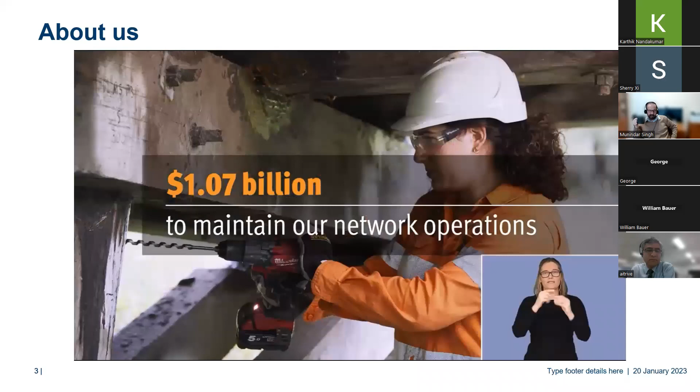Queensland, home to more than 5 million of you. We're connecting you from A to B by more than 33,000 kilometres of state-controlled road, 6,000 kilometres of rail track, and 130 million public transport trips each year. Our job, no, our passion, is to deliver a network that is accessible to everyone at every age or stage. We're investing more than $5 billion to improve our transport infrastructure, making your roads more flood resilient and bringing new ways to pay, so you can use our network your way. We're making your health and safety our top priority. We're always listening to you, creating more online services than ever, serving customers online over 11 million times each year. We've kept the state moving, transporting more than 1 billion tonnes of freight, adding 27 kilometres of new cycling infrastructure, and building 9 new boat ramps, pontoons and jetties. We're investing more than $1 billion to maintain and improve our network operations. We're recycling over 1 million tyres and using them to build our roads. We're switching more than 35,000 streetlights to smart LED technology. We're creating a transport system that's environmentally friendly and socially sustainable, investing in skills, creating jobs, and embracing new technology. Queensland, we're here for you, to connect you to family and friends, schools, work and hospitals, to create a single, integrated transport network accessible to everyone.

Right, now my role in such a large and vast department is leading the Cooperative and Highly Automated Driving pilot. Back in, I think it's about 2016 or so, a lot of the car manufacturers were coming up with some fantastic statements which they struggled to fulfill, as we can see now with the benefit of hindsight. And in those days we were a little bit concerned about what we as a department are doing to ensure that this technology and the vehicles are rolled out on our network in a safe manner.

And so the entire work, which we started initially from 2016, ended up with a team called the Cooperative and Automated Vehicle Initiative team. And within that team, we have several projects which focus on connected technology as well as on automated technology. And my role is I lead the automated side of those technologies.

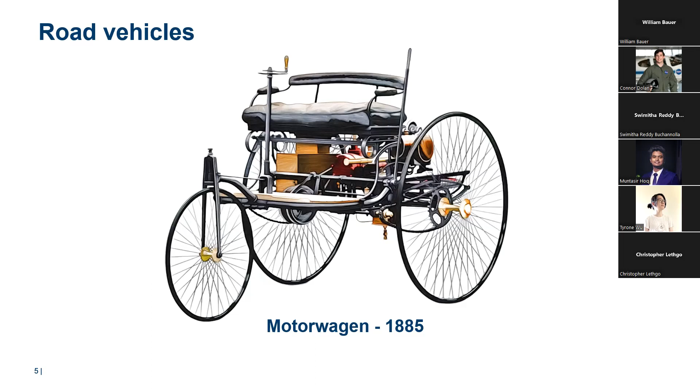Over the years, the automobiles have evolved significantly, and over 135 odd years, this is what today's vehicles look like. They're totally different, but when you scratch the surface, the fundamentals are very similar. There had been significant improvements, but there had been one unreliable component which existed in 1885 and still exists in today's cars, and that is a human driver. So much so that in 1885, when Carl Benz was demonstrating his motor wagon, he actually crashed into a wall during the demonstration, potentially the first recorded road crash in the history of automobiles, I would say.

While the automobile technology has improved significantly, in the meantime, the computer technology has evolved many fold. If you look at the computer of the day in 1885, the Thomas arithmometer was basically a mechanical calculator, and compare that to today's computers. I have on the slide NVIDIA's Orin chip, which packs some 17 billion transistors and 200 trillion operations per second. I've seen some of NVIDIA's latest presentations, and they have now got a new one. I think they call it Thor, which is 5 times faster and packs in, I think, 50 plus billion transistors in a 1 square inch die of the silicon chip.

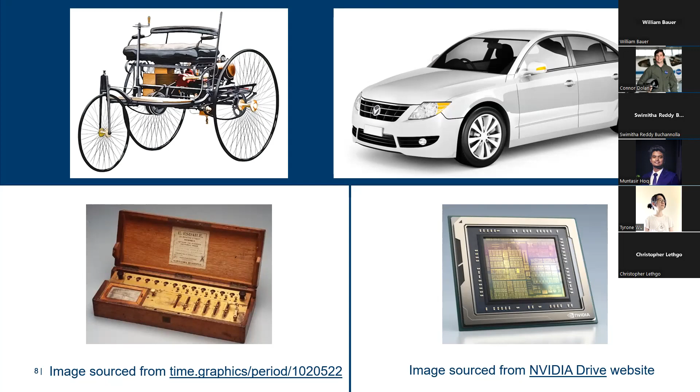Now, because of this massive transformation and development in computer hardware and software, this is the first time ever that we could think about either replacing that unreliable component in automotive, which is a human driver, or supporting a human driver. But at the same time, we know that when you introduce a new technology into the mix of our current road infrastructure, vehicles and road users, it comes with new risks. And we need to understand those new risks so that when this technology arrives on our roads, we have appropriate mitigations in place. Because of that, when we started thinking about it in 2016 or so, we came up with this project, which we call the Cooperative and Highly Automated Driving pilot.

We did a lot of negotiations and other things, but it actually started when agreements were signed with our university partner, Queensland University of Technology, and our federal government research institute through federal government funding, called iMOVE Australia. So, as I said, our focus is safety. The scope of our project is trying to understand the safety impacts and benefits of cooperative and highly automated driving. In that, particularly, we were focused on the benefits or impacts on road infrastructure, and that is physical infrastructure.

Then we also want to have a look at digital infrastructure, and that is work package two. So we have several work packages in the pilot. Then the impacts of interactions with other road users. We acknowledge that in Australia we would have unique Australian conditions, and for that there'll be some unique solutions that need to be developed. And we wanted to understand what those unique Australian conditions are. For example, in Australia we currently do not have any automotive manufacturer. We basically import all our cars. So we recognize that the technology is going to be developed in the United States, Europe, Japan, or China, and we will be the consumers. So we wanted to make sure that when the technology is developed overseas, those developers ensure that certain unique Australian conditions are appropriately taken into account.

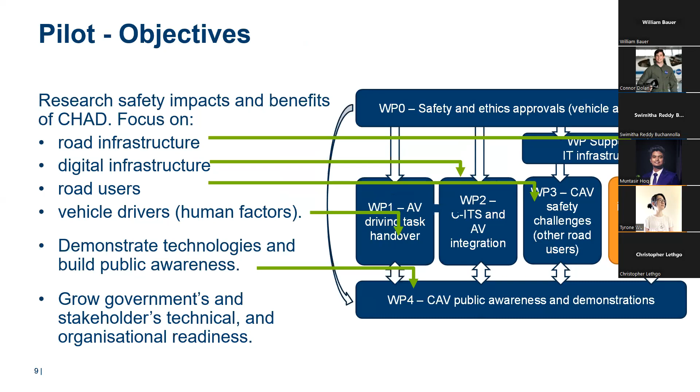And in looking at the physical infrastructure side using Zoe 1, we actually drove the vehicle for about 1,200 kilometers on the Southeast Queensland road network, day and night, in various weather conditions, in a rural environment, urban environment, highway environment, and tested 4 separate competencies: road lines, road signs, traffic lights, and accurate localization positioning.

We took whatever was available as an initial stage. We took algorithms which were open source, and then we trained them ourselves to work out what are the limitations of those algorithms for those particular competencies. So for example, this was done in 2019, we used LaneNet. It's an open source algorithm. We trained it for our road conditions, for the line detection, and with a little bit of training, we were able to get very good performance on line detection.

And why we needed to do this, we actually wanted to open the box of AI and understand how AI functions itself. There were a lot of projects in Australia in 2019 where people were buying off-the-shelf vehicles, Audi, Mercedes, Tesla, and so on, and then put a camera and observe what the vehicle was detecting and then concluding. And we thought that may not be the right way, because technology will change, and we cannot keep on changing our road infrastructure for the evolving technology. So we said, instead of that, let's question the technology itself.

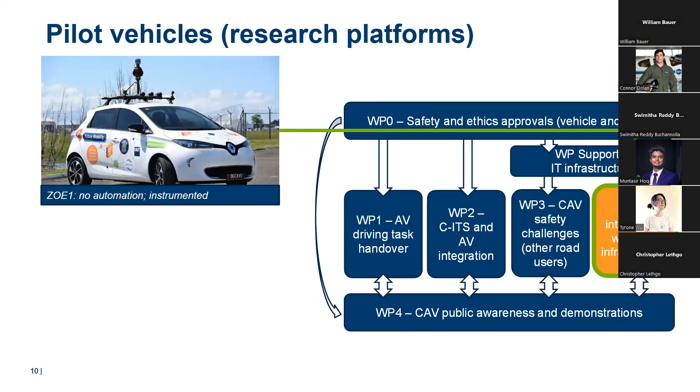Then we are working on various work packages. Work package 1 is, as I said, driving task handover. We have recruited several public participants representing various age groups and so on. They sit in Zoe 2. We actually encourage them to come along with a book, and Zoe 2 drives them around in a controlled environment. So we have a closed test track, and Zoe, our vehicle, drives them around for about 33 minutes while they are either reading a book or watching a video.

And along the way, we also designed an experiment where they need to answer some questions about the video they're watching. What we're trying to do is involve them in a cognitive way, and along the way, the vehicle triggers a takeover request. We have all sorts of sensors around, including the driver's gaze. And we also do analysis to work out, following the takeover request, how long it takes for the driver to exercise appropriate, safe control and come into situational awareness.

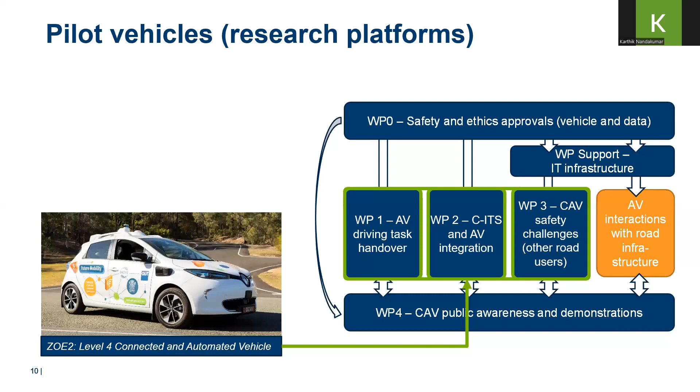And those 3 are our unique wildlife, especially our kangaroos, and our long trucks, so we have road trains that are quite long, and we have some unique roads in the country which are narrow, 4-meter wide sealed roads with unsealed shoulders, where we have traffic in both directions on that narrow road. So these are 3 unique situations, and we have collected a few thousand kilometers worth of data, and now we are creating algorithms to deal with those situations, and the learnings will be made public sometime in August, September this year. So these are the kind of detailed work that we are doing with our cooperative highly automated driving pilot.

Now, I understand that this group is more interested in AI and how that plays out in automated vehicles, so I've got a few slides on it. The way automated vehicles function, and literally from Waymo to everyone, they will tell you the same thing, they basically have four blocks within which they work: localization, knowing where the vehicle is in the world; perception, knowing what's happening in that environment; then decision making; and then control.

Decision making is basically based upon various road rules, estimated trajectory, and creating a path forward. And control is basically providing information for the hardware, such as steering angle, brake, acceleration, including the side lights and hazard lights, and so on and so forth.

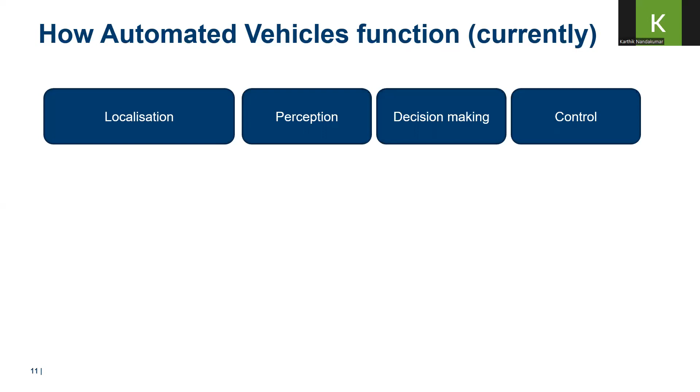So localization, the way things are currently being developed and carried out, you have lots of different ways of doing it. So you've got GPS supported by RTK, inertial IMU, and there are lots of different ways and different technologies that you could use. You have simultaneous localization and mapping, SLAM systems. Literally everyone uses them, and for that you will need some sort of a prior map of the environment to have fairly high levels of accuracy.

When it comes to perception, you've got all sorts of sensors. I just listed a few sensors, but at the end of the day, all the sensors are used for object detection, recognition, and tracking, and then situation understanding via scene segmentation. I've seen some companies use some other sensors as well, microphones. Some of them have an infrared camera as well. So there are different ways of doing those things.

When it comes to decision making, things like road rules, predicting the trajectories based upon potential interactions with various actors in the environment, and then control, as I mentioned, steer, brake, accelerator, side lights, and so on and so forth. Now, when you look into each of those blocks, there is a significant amount of AI being used for localization and perception. But, and again I would stress this, currently there isn't as much AI being used for decision making and control, and there are reasons for it.

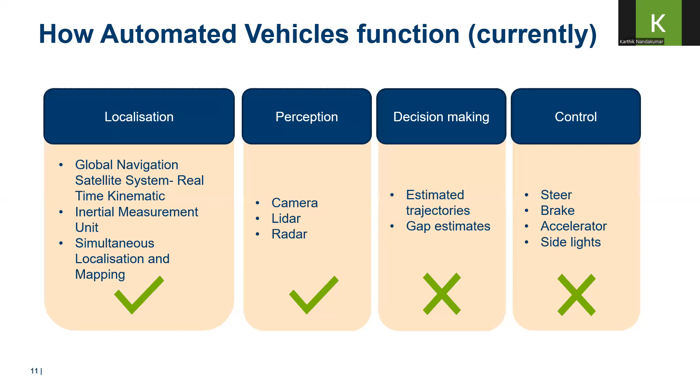And in that co-regulatory model, the criterion we have is so far as is reasonably practicable, and that's our safety criterion. We are not prescriptive about how you achieve that, and that way we allow the manufacturers and tech developers room to innovate. But at the same time, our draft codes clearly mention that the tech developers will need to provide a statement of compliance. So although it may not sound prescriptive, there are technical standards involved, and the tech companies will need to adhere to them and provide a statement of compliance.

Now, one of the key differences between a prescriptive regulator and a regulator who discharges its duties under a co-regulatory model is the word approval versus acceptance. When you have a prescriptive regulator, certain actions or deliverables are approved, and that's the word being used. While in a co-regulatory model, the word approved is not used. Instead, we use the word accepted. In other words, these are your claims, this is your statement of compliance, we ask a lot of questions, and then we accept and provide a permit, or we don't accept and we don't provide a permit. So there's a major distinction between the model of co-regulation versus the model of prescription.

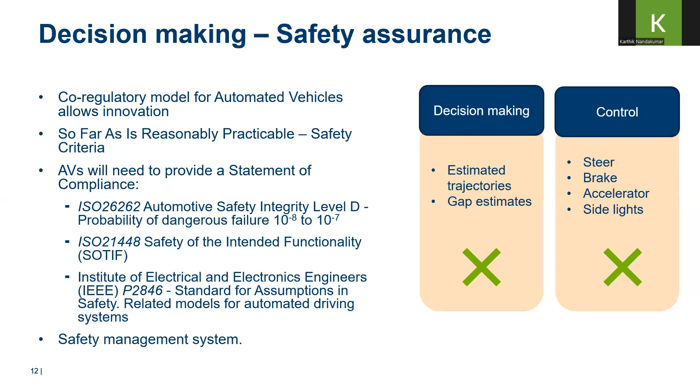I have a slide on that, so to save a bit of time, I will jump straight onto the next slide. But in all of that, our regulation also requires that you must have a safety management system. That is to ensure the fundamentals of so far as is reasonably practicable. In other words, if you find some issue with your system, your safety management system should proactively try to resolve it and reduce the impact of it, and then it should not be reproducible again. All that is part of our current draft codes.

So I'll just quickly go into the decision making. I touched upon 2846, and I said it's not part of our regulation, but it will be expected from the tech providers that this is being implemented. And the reason being is: how safe is safe enough? P2846 is actually an initiative by the tech providers, the industry. The working group which put together this standard involved everyone from chip manufacturers to software designers to tier 1 suppliers to OEMs, literally everyone in the world, except one notable company being Tesla.

Everyone got together and basically said, well, how safe is safe enough? So along the way, somewhere, we will have to make some decisions. And so far as is reasonably practicable, that criteria, what does that mean? How safe is safe enough? So with this standard, let's say currently our rule says that when you're following another vehicle, you must maintain a safe distance, and generally that's about a 2-second distance.

Now, when we say 2-second distance, and when you look at the rule-based decision making that is currently in place, there is an equation, and in that equation, the automated vehicle needs to assume the vehicle ahead and its braking characteristics. And the problem we have here is that you have all sorts of vehicles on the road. So if you pick a Porsche 911, it has one of the best braking characteristics.

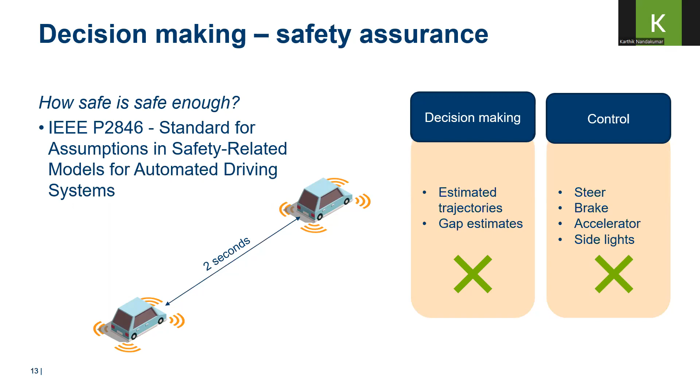So my point is that there may be a general perception that the decisions in these vehicles are being made based on AI. That may not be fully correct. These are pretty much rule-based decision making. When you go to control, again, similar things. In the industry for 40-odd years, controls have been done through proportional, integral, and derivative PID controllers. And similar things are happening in automation as well. We use PI controllers for our steering control right now.

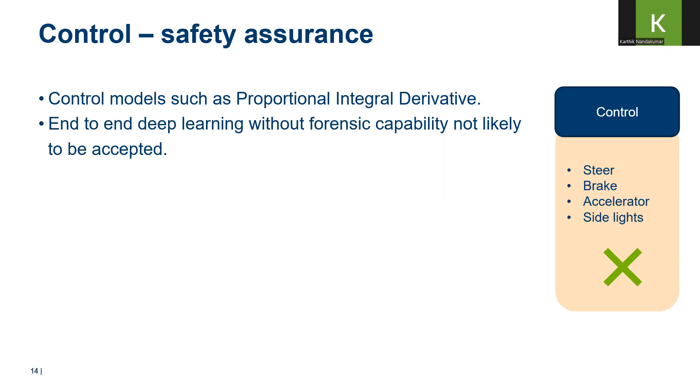If someone wants to use end-to-end deep learning without forensic capability, currently we do not think that any engineering firm would give you any compliance certificate, because what are you measuring against? We have no capability to forensically test the outputs of that system.

Now, just to give you an example of what that means, let's say I'm driving my level 4 automated vehicle on a highway. As a human, I'm driving, and there's a truck ahead of me, and I can see there's some loose load which may come loose and fall in front of me. I see that, I understand the situation, and I take some action, although nothing has fallen yet. Now, think about an automated vehicle the way they are designed currently. If they are not trained for such situations, they're not going to do what I did as a human.

And interestingly, let's say I've been driving for 30 years and I have never come across this kind of situation. Still, somehow with my growing up and various learning, I was able to apply that and work out that I need to move away from here. But the AI, the way it is currently, will never do that, because they are trained in a driving environment, and this kind of training was never part of its algorithm, so it's never going to do it. But if you end up with level 6 autonomy, then it's beyond AI.